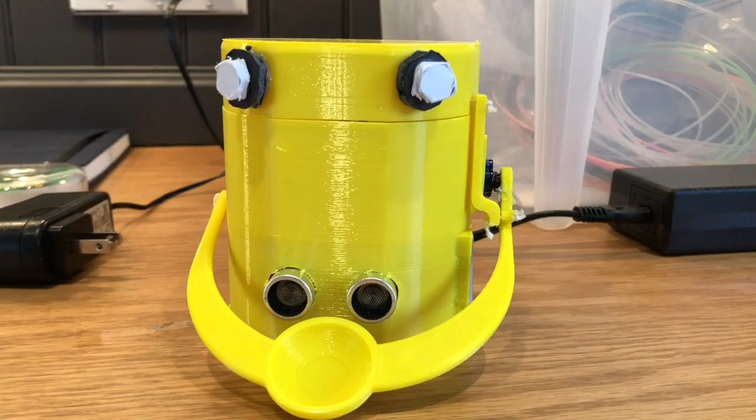This is Josh Dolgan, and this is my medium ISP, the Smart Trash Can. In this video, I will be discussing the code and the 3D design, and then showing you the final working product.

This is my code. It is designed to scan the front tray, and if something is sensed in the front tray, it will use the lift function to lift the servo and place whatever is in the placement tray. Once there, it will scan the depth of the trash can and display the depth using the 10 LED bar graph.

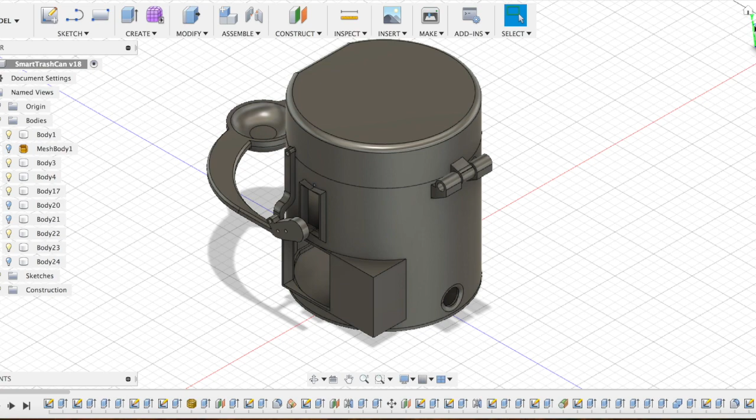This is my 3D design for the Smart Trash Can. It's designed very modularly, so if one piece doesn't fit, then I can reprint it and make sure that it fits perfectly. So on the front here, this is the placement tray, which is monitored by the HC-SR04 sitting in these two holes here.

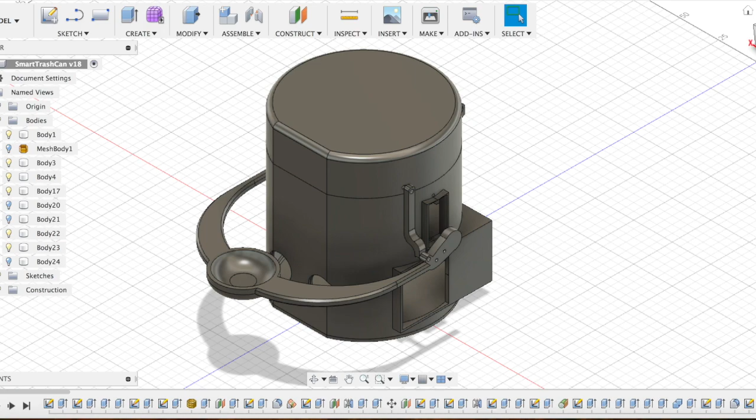If the HC-SR04 senses something in the placement tray, it will lift the servo arm. The servo will be placed right here. It will lift the servo arm, which will subsequently lift the lid due to this arm here. The lid is attached to the base by this hinge at the back, which will be secured with a zip tie.

So once the arms are removed and the lid is removed, now you can see the large reservoir on the inside. This is where all the trash will actually sit. As you can see again, the servo motor will be sitting on the inside here.

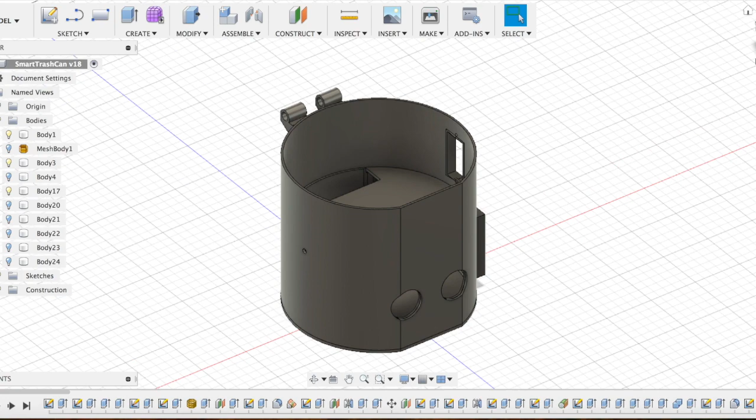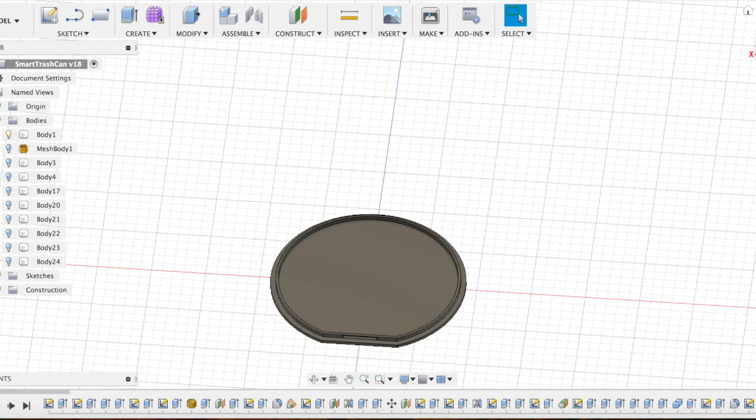Once the larger reservoir, the big base plate, is removed, then you see here, this is where I will store all of the electronic components, the Arduino, the PCB, the HC-SR04, and the wires for the infrared sensor, and the servo motor will come out through this hole. And finally, everything will be secured by this base plate on the bottom, which essentially connects the larger reservoir and the Arduino housing together. This is the final design for the Smart Trash Can.

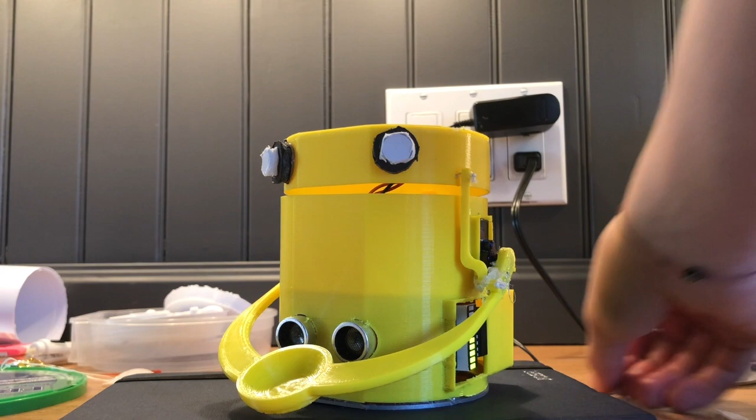As of now, unfortunately it does not work perfectly, as the arm sometimes does not lift all the way up, and the object does not get placed inside the larger reservoir. This can be fixed in a later design, but as of now, it works fairly well and has some accuracy.